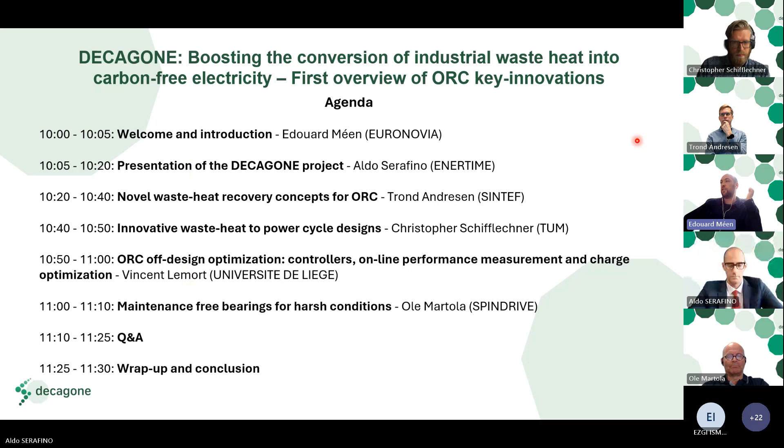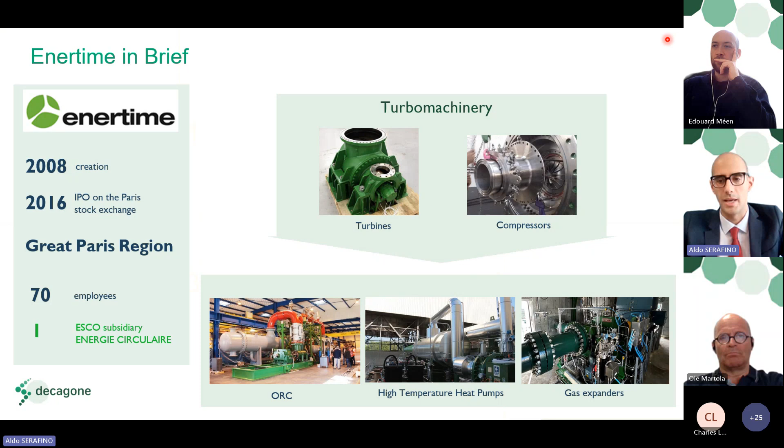I'm Aldo Serafino, Director of R&D Projects at Enertime, which is a French SME created in 2008 and based in the Greater Paris region with 70 employees. We manufacture turbines and compressors, and we are a producer of organic Rankine cycles, high temperature heat pumps, and gas expanders. My role here today is introducing you to the DECAGONE project.

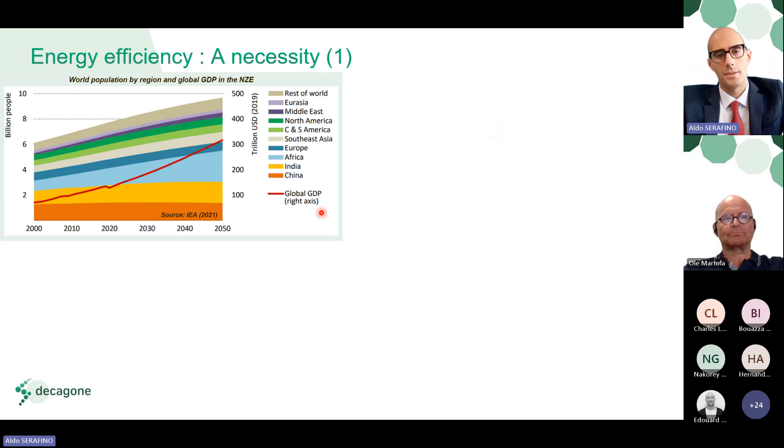This trend, on the one hand, results in an increase of total energy demand. On the other hand, if no action is taken, it results in a surge in greenhouse gas emissions. To indicate needed action to avoid the surge in greenhouse gas emissions, the International Energy Agency has introduced multiple scenarios in their World Energy Outlook that they publish every year. These different scenarios are indicated with different acronyms that you can see here. I will focus here on the last one, the NZE, which stands for Net Zero Emission. This is the scenario envisaging zero net greenhouse gas emission by 2050.

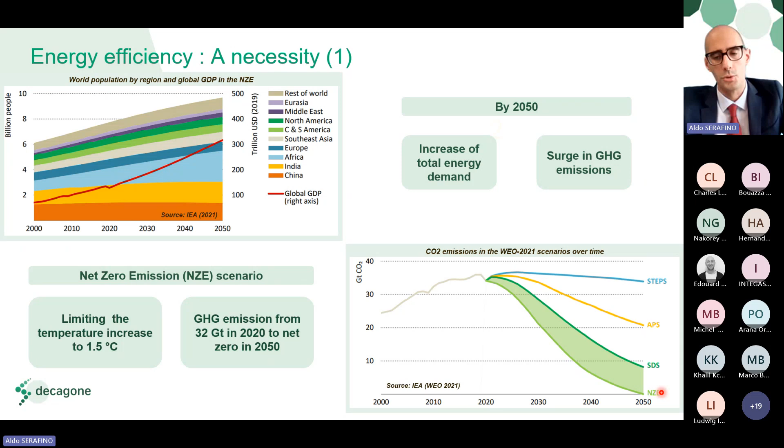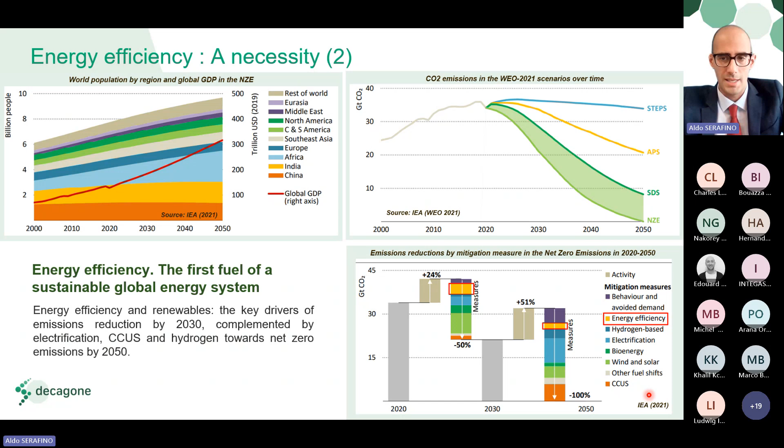So far, we know that this is the only scenario among all these scenarios that limits the temperature increase to 1.5 Celsius degrees by 2050. Now, this scenario showed that the global energy-related and industrial process emission of CO2 equivalent in 2020 is about 32 gigatons. And in 2030, it should reduce to around 21, and we should reach 0 by 2050. Achieving this rapid reduction of CO2 emissions in just 30 years requires a broad range of approaches and technologies.

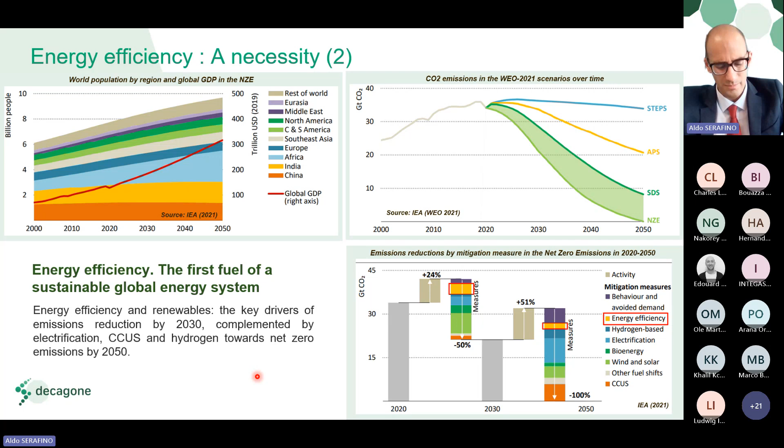The key pillars of decarbonization for the global energy system are here listed as energy efficiency, behavioral changes, electrification, renewables, hydrogen, bioenergy, and CCUS. In particular, energy efficiency and renewables are the key drivers for emission reduction by 2030, and they are later on complemented by electrification, CCUS, and hydrogen in the second stage of this sprint towards 2050.

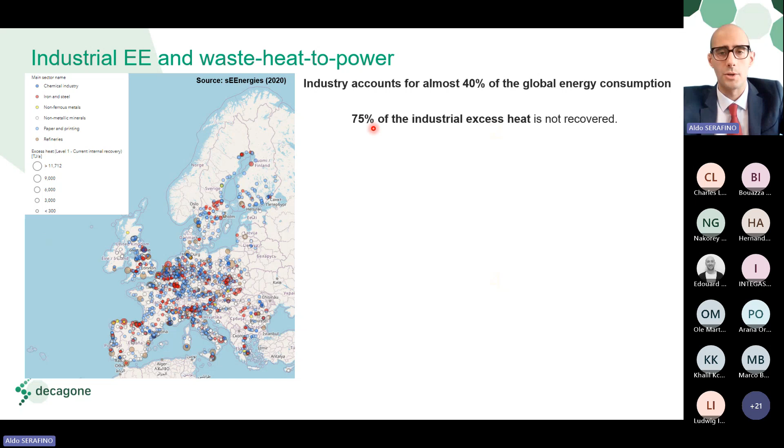There is a white paper by the Knowledge Center on Organic Rankine Cycle that did an estimation. If we consider only the low temperature and medium temperature excess heat that is now not exploited in Europe, and we exploit it by waste heat to power, we would potentially produce around 150 terawatt-hour electric per year. Now, this number, 150 terawatt-hour, is about 5% of the total annual electricity produced in EU 28,

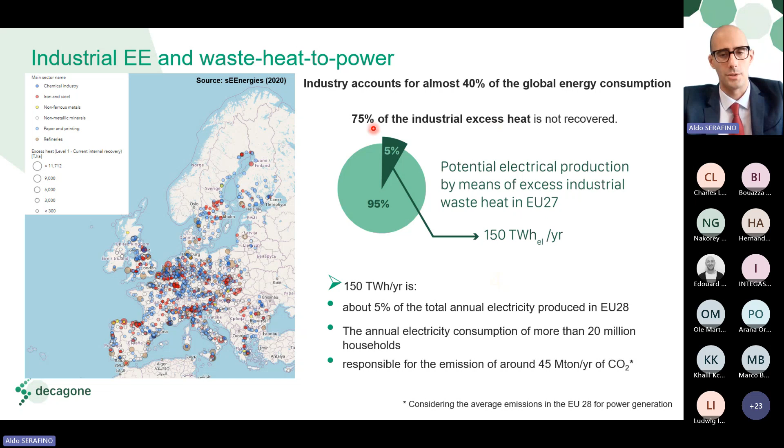is the annual electricity consumption of more than 20 million households, and is responsible for emission of around 45 megaton of equivalent CO2 per year, if you consider the average emission in the EU 28 for power generation. More specifically, organic Rankine cycle, also known with the acronym ORC, is a competitive technical solution to valorize industrial waste heat and convert it into electricity.

I'm not going to explain the general schematic of an organic Rankine cycle because I consider that everyone here already knows the system. If you want me to explain it, please write a question and I will do it in the Q&A. But here I would like to focus on some rather positive aspects of this technology. In fact, the electricity generated on site by the organic Rankine cycle does not cause any additional emission and is dispatchable and reliable.

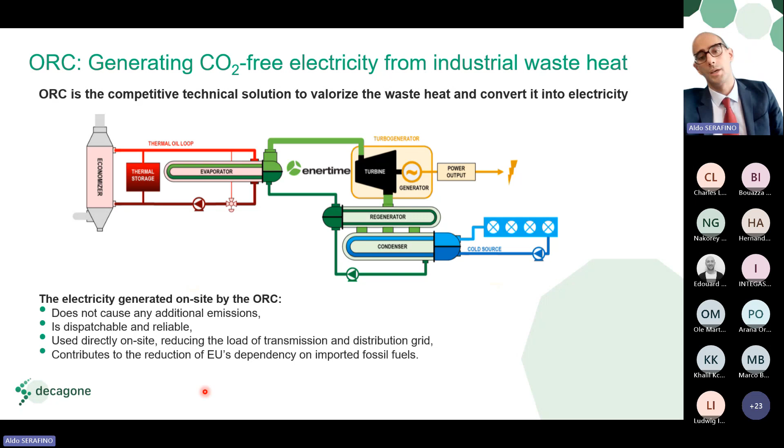Furthermore, in a context where electrification is becoming more and more important, the electricity produced by the ORC can be used directly on site without further burdening the transmission and distribution grids. And finally, the electricity generated on site by the ORC contributes to the reduction of the European Union dependence on fossil fuel and imported fuel.

In this context, the DECAGONE project takes place. DECAGONE, or demonstrator of industrial carbon-free power generation from ORC-based waste heat to energy system, is a Horizon project involving a consortium of 16 partners from 10 countries with a duration of 4 years. It started in June 2022 and it will finish in May 2026, with a budget of around 18 million euro.

The ambition of DECAGONE is preparing the ground for industrialization of advanced ORC-based waste heat recovery systems, aiming at wider and faster market uptake. Such an ambition is based on 3 pillars. The first pillar is increase in efficiency at the nominal point, the design point of the ORC, but especially in off-design conditions and overall, on the whole lifetime of the system.

The second pillar is the reduction of the total cost of ownership. With DECAGONE, we want to propose an ORC technology with lower CAPEX and especially with lower OPEX. And finally, the third pillar is system replicability. The technology proposed in DECAGONE will be easily replicable in the main energy-intensive industries. We target mainly the steel sector, metal, cement, petrochemical, glass, and oil and gas.

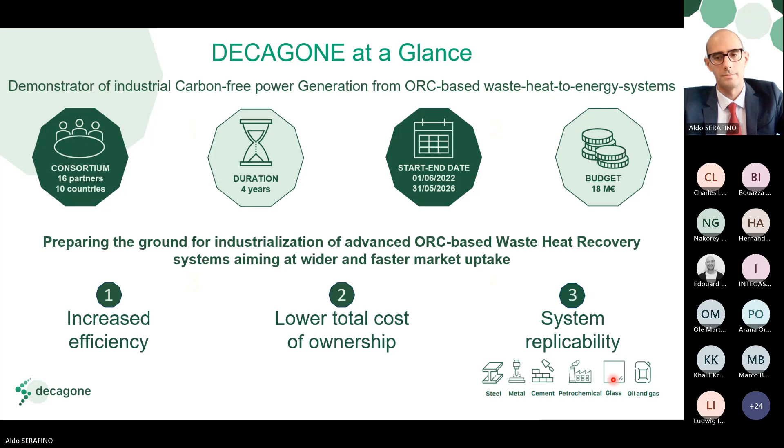Now, a key part of the DECAGONE project is the demonstration at TRL7 on an industrial scale. Specifically, in DECAGONE, we are going to perform the installation, the commissioning, and operation of a 2 megawatt demonstrator plant that will use the waste heat from the Třinecké železárny steel plant in Třinec, Czech Republic, to produce 2 megawatt electric power.

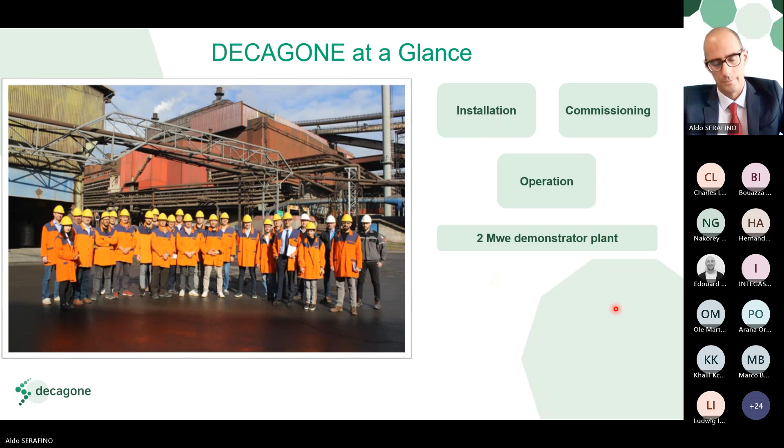Therefore, to summarize in just one sentence, DECAGONE proposes key innovations making organic Rankine cycle systems for industrial waste heat recovery more efficient, cost-effective, and flexible. But basically, how do we do it? Within DECAGONE, we set 5 objectives that I list in the following. The first objective is the development of new component architecture, models, and technologies. The second objective is validating innovative approaches using new experimental setup and design capacities.

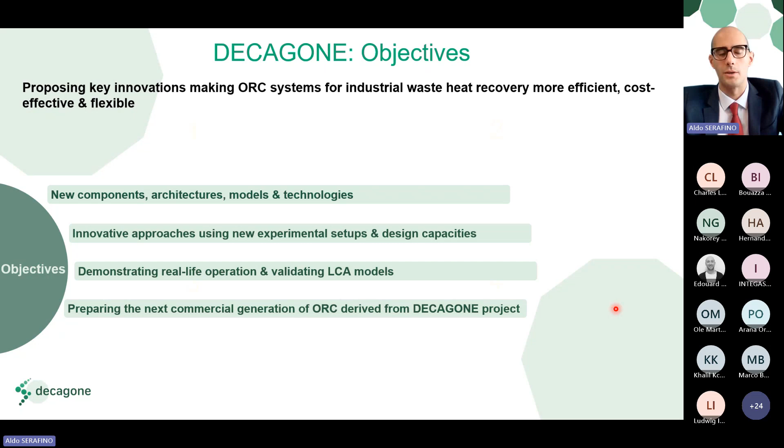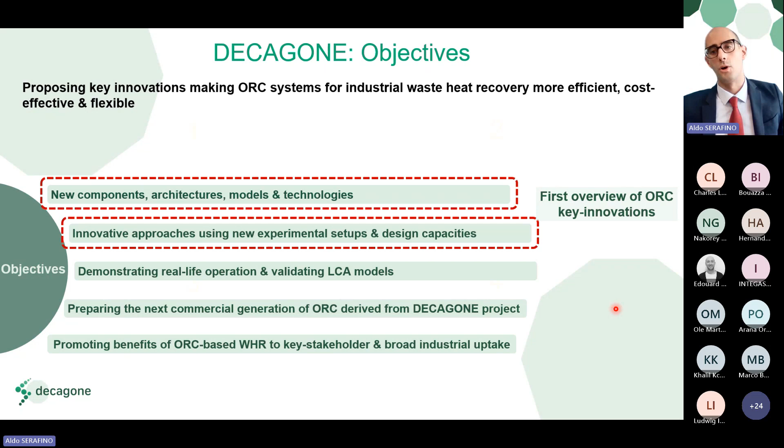The third objective is demonstrating real-life operation and validating the LCA model. The fourth objective is preparing the next commercial generation of ORC derived from the DECAGONE project. And finally, the last objective is promoting benefits of ORC-based waste heat recovery to key stakeholders and broad industrial uptake. In this webinar today, we will focus on the first 2 objectives, and we will provide you with a first overview of key innovations for the DECAGONE ORC.

Now, exploiting waste heat from an industry, such as for instance a steel mill, poses multiple challenges that should be taken into account.

Without being exhaustive, we can think, for instance, of the fact that exploiting industrial waste heat means that every fluctuation of the industrial production results in a variation of the heat that is available for the organic Rankine cycle. Moreover, depending on the process, we can have a different composition of the flue gas with different dust content, and this has an impact on the heat exchanger part.

And then we can also consider the fact that installing a system in an existing industrial facility places considerable constraints in terms of available space for this new system. Therefore, to be successful, the DECAGONE project must come up with a technology that can deal with all these challenges. We have therefore worked on

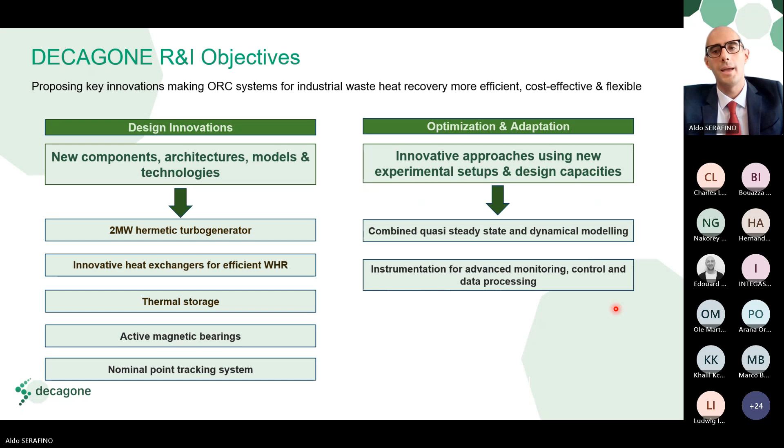the development of a 2 megawatt hermetic turbo generator, innovative heat exchangers for efficient waste heat recovery, thermal storage, active magnetic bearings, and the nominal point tracking system. Moreover, since we want to optimize the system with models that we also want to validate and retrofit, we worked on combined quasi-steady state and dynamic modeling, and on advanced monitoring, control, and data processing.

And once the demonstrator is in operation, we will perform in-operation control and monitoring, validate the modeling, and perform the retrofit of the component design. Today, DECAGONE is almost at the mid-life of the project; we have already worked for 21 months.

So my name is Trond Andresen. I come from SINTEF Energy Research, a research institute in Norway. Today I will talk about some aspects and considerations around our heat recovery system for an ORC, specifically for the demonstrator in the DECAGONE project. This has been a collaboration with most partners in the project, but what I'm presenting today can mainly be credited to input and contributions from SINTEF, Enertime, and CEA. So I will not take the glory of all the work here, but I'm happy enough to present it.

I'll start by talking a little bit about what makes the conditions at our demonstration site special, and then I have to select something, because we have done a lot of work in the last 2 years. So I will talk mostly about the waste heat recovery heat exchanger and the thermal storage as part of this heat recovery subsystem.

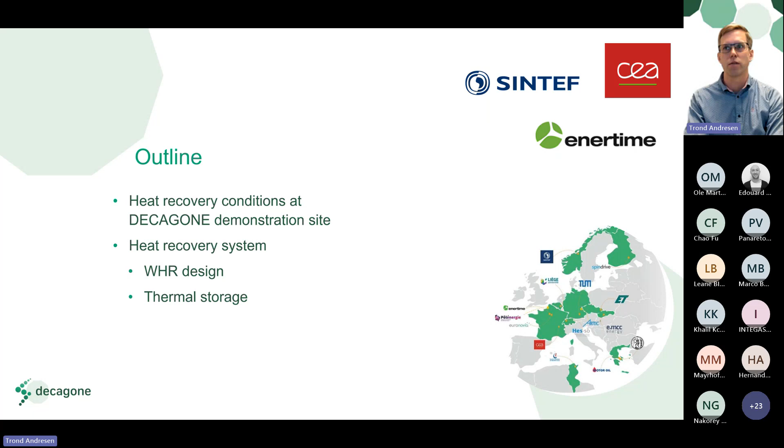So first, one can make some reflections about why we are really focused on this demonstrator, and I guess that's also what's really interesting for most of us. DECAGONE is, as Aldo just said, a research and development project for the next generation of ORC technology. On the other hand, it's designing, commissioning and testing a demonstrator for a very particular implementation. As academic and research partners, we have a very interesting role in this project, where we are conscious that we don't have all the answers, but we can maybe offer a different perspective on the development of such a demonstrator.

And as we are not constrained by any product or solution that we are selling, we feel more untethered to explore and compare various technology options. That's one of the things the research partners in this project have been doing: looking at all the different options and reviewing them in our way.

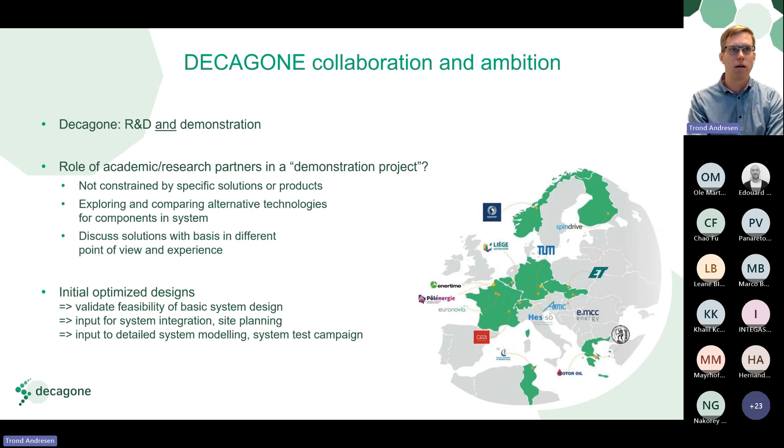But also, since there is quite a tight schedule in this project, we have to do a lot of things in parallel, which means the more information and realistic behavior about the system and components we can come up with in the development phase, the more it will help the implementation of the project. So we have also provided what we refer to as initial optimized designs of the components. While they are not necessarily indicative of what solutions will be implemented in the end, this is a way of validating that the performance we are aiming for can be reached with a design, even when performed by researchers. And this is really useful, because then we can continue the work with system integration, permitting and site planning, making sure everything fits on the site, and also plan instrumentation and control strategies.

So heat recovery, I will talk now a lot about the demonstrator. And as Aldo said, it's to be implemented at the steel plant in the Czech Republic. But that also means that we are very much needing to adapt to an existing process, a live plant and infrastructure that's been built up and evolved for many, many years.

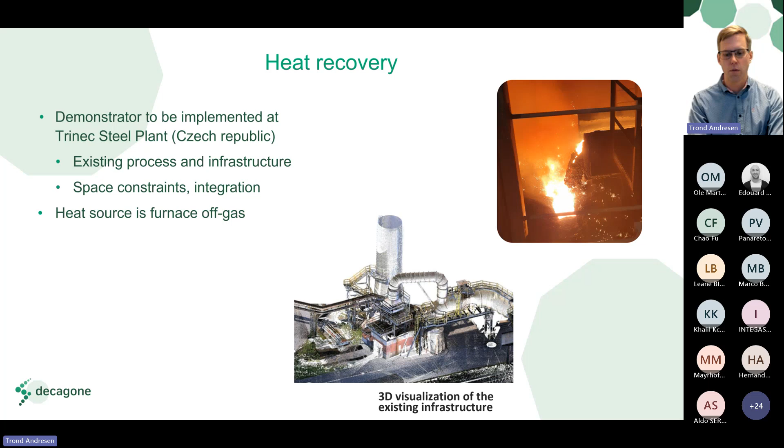And that means that we have space constraints. It means we have very site-specific conditions, for instance, the off-gas we will talk about, and also integration of a system in a brownfield such as this is really complicated. So the heat source is furnace off-gas,

and it was documented in the site analysis that the heat content, the thermal power in this off-gas, in this heat source, is very variable. And it's not just the flow rate that's varying, it's also the temperature. So we have two things changing.

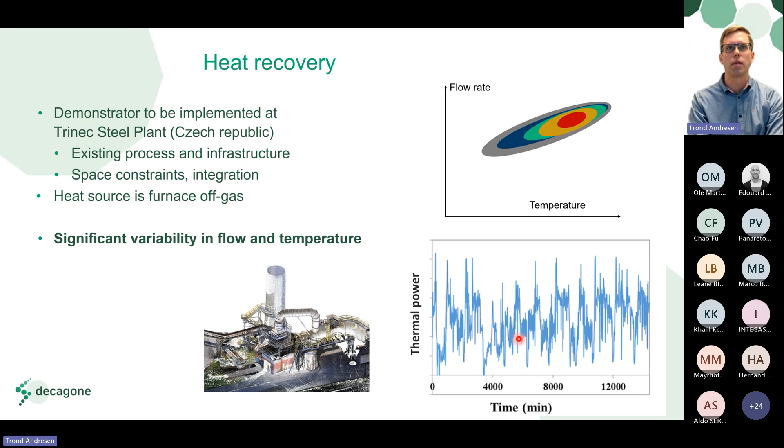So while we can see from the site analysis that the average thermal power in our off-gas is more than sufficient to, let's say, align with our ambition of a power output of the DECAGONE project, the variability is certainly a big issue. We don't want to see this kind of rapid variability in our ORC. So that's a particular challenge.

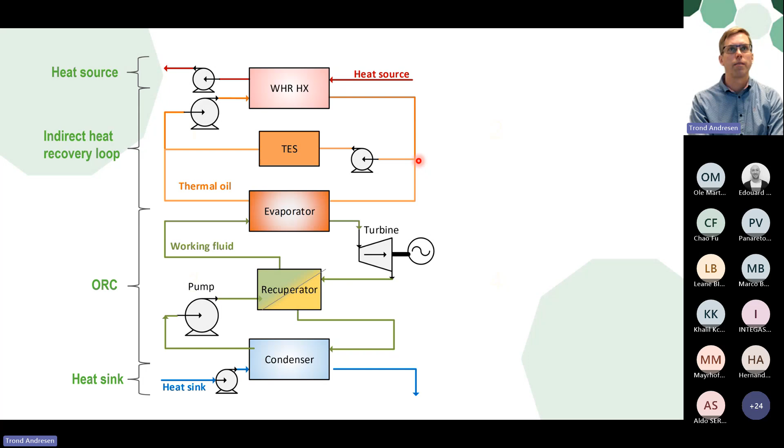So here I made my own very simplified outline of the whole system, of course aligned around the heat exchangers and thermal storage, which has been my main focus and interest in this project. But in this sketch, we can see that the ORC, the core ORC, quite normal recuperated ORC system, is placed here. And then between the ORC and the heat source, we have an indirect heat recovery loop, or if we include all the components in the system, it's what I would call the heat recovery system.

And then, as I said, our problem is that this energy in this heat source is quite variable. And we really want to decouple this heat source from the ORC. So we need to design a heat recovery system that not only needs to work, let's say, theoretically optimal, but it also has to be implementable and be able to fit in this location.

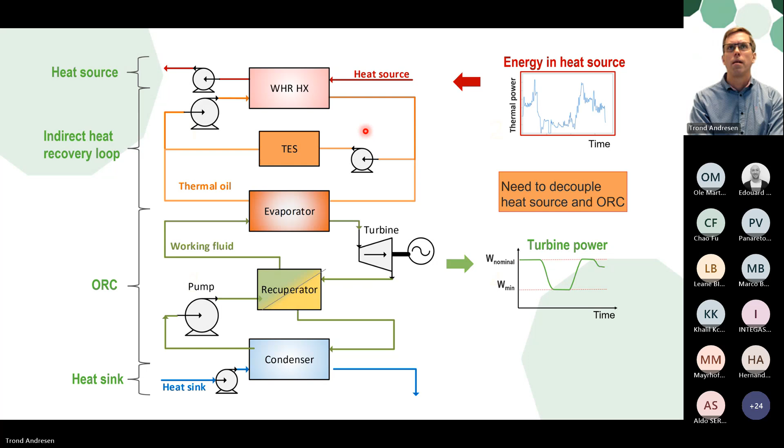So first, I would say a few words about design considerations for the waste heat recovery heat exchanger. And this is what actually sees the highest fluctuation in conditions. But nevertheless, in order to perform a design, as part of the basic design of the whole system, a system design point also for this heat exchanger was selected, and then we have a set of performance requirements to focus our design around. So that includes duty and it includes temperatures on both sides, but it also means we have a maximum limit on pressure drop that we must observe.

And now this design point can be the basis for all our various theoretical evaluations, which includes looking at different options for all the heat exchangers, even considering stuff that is not feasible for the demonstrator, but could certainly be possible in future implementations in a different industrial scenario and a different heat source, etc. And that includes stuff like direct versus indirect heat recovery, technology options such as heat pipe, which really lends itself more to a direct heat recovery implementation. So with all that aside, we can start working on how to make the best possible design for this system design point and for each technology we look at.

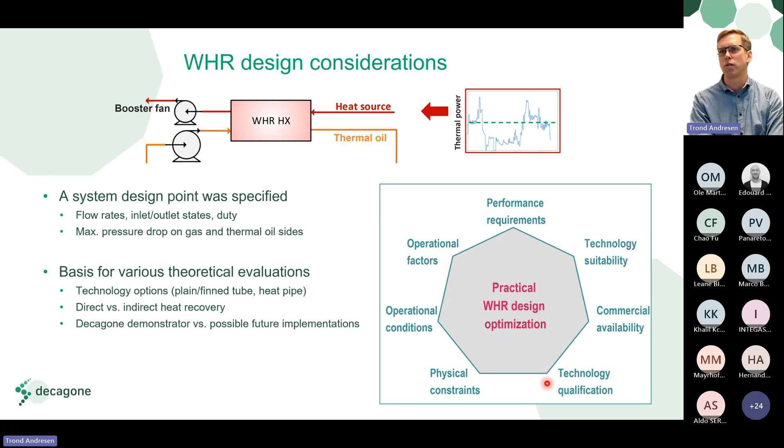Yeah. So with all that in place, we can then start doing design optimizations. And optimizations are really just another word for trade-offs. There's no free lunch. But what we are aiming for in our case is the highest possible performance for low cost in a compact package. But this is not easy to do on a pre-engineering level, and it's very complicated to reliably optimize.

And for the next slide, I will just show a plain tube bundle in an indirect system, which means the off-gas is here, and then across the off-gas flows the thermal oil in plain tubes with no fins, basically. And then we can produce an optimized design specification of how this heat exchanger should look and whether or not it could meet these performance requirements in a reliable way.

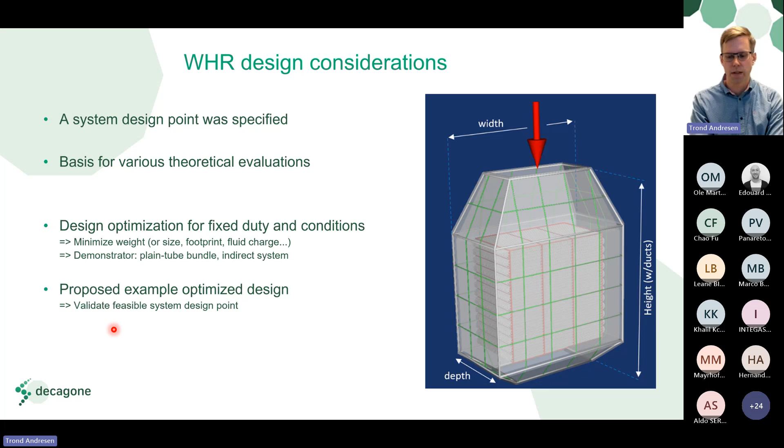And even for such a simple heat exchanger type, there are a lot of design parameters to optimize. As I said, inside this shell there will be this coil of tubes. And then, of course, each tube has a diameter, it has a wall thickness, it has a certain spacing longitudinally and transversely, and the tubes have a length. These are all continuous variables in optimization.

And then we have a lot of configuration options, which are discrete variables, integers, if you will. It's the number of passes, the number of rows, how it is configured and laid out. And finally, we have influence from the casing itself. It has some duct plates, support structures and beams and a certain diffuser angle. So the size of the core will then dictate the size of the casing and then the weight of the

casing in the end. And as I said, for each of these design points and performance criteria, we want to minimize the weight of the casing and the support and the core itself together. And we could add on the fluid weight in addition, but in this particular technology, it is relatively minor compared to the steel weight.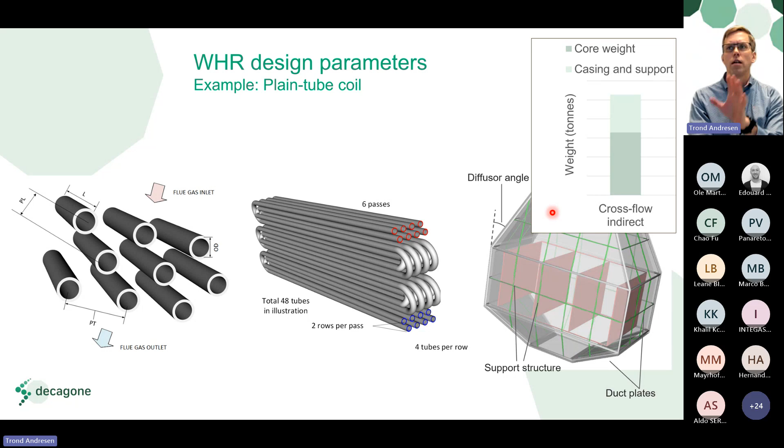So we can complete a design such as this that we can propose, but it's really important to understand the influence of these parameters that we have decided upon in this design point, in the performance criteria. And one that's not so easy to relate to, but has crucial importance, is the gas side pressure drop. Since we have considered that you need to use a booster fan to compensate for any pressure loss on the gas side in our system, that fan work will be detracted from the net power. So naturally, we want to have a very low pressure drop on this gas side.

But if we perform such a weight optimization for different budgets in flue gas pressure drop, we can clearly see the weight of the heat exchanger, and that also very much indicates the overall size of this heat exchanger. And that again translates to cost. So if you want a heat exchanger with very little fan work, it will be massive and expensive. And at some point, it will probably not fit at the demo site. So this is very much an example of a real trade-off, where we think a good trade-off will probably be in this region somewhere. There are benefits and trade-offs to such an optimization, and to understand that and take it into system design is interesting but complicated.

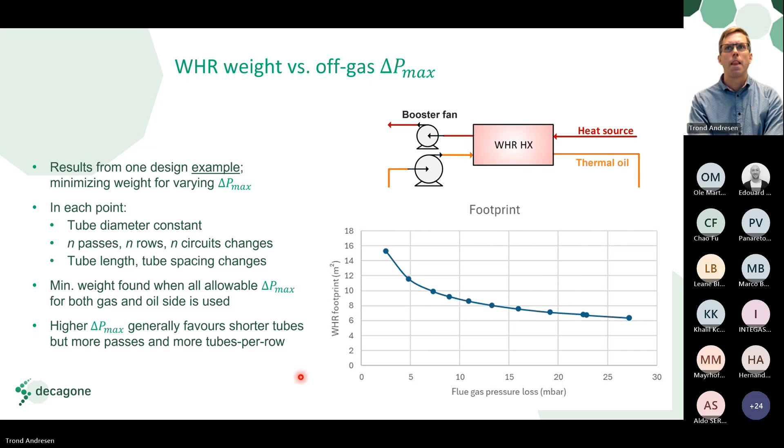So then when we have our example design, we very much need to understand the off-design behavior, because this is the component that will see the highest variation in conditions. So with a fixed design of everything, we can then investigate how the oil temperatures will change with the temperature and flow rate, and how the capacity, the duty of the heat exchanger will change. What kind of outlet gas temperatures will we see that will propagate down the rest of the system, and the pressure drops on the oil and gas sides.

Again, you fix the design and you do the off-design behavior test, more or less, to see if it's compatible with a control strategy and an operational envelope for the system.

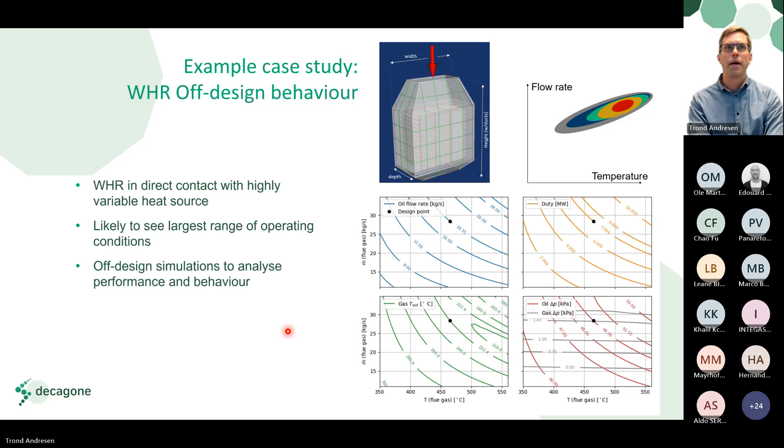So that brings me over to the next point. We have seen a little bit about the design considerations going into this component. Now we are turning to the next, maybe most exciting component in the system, a clear novel addition in a practical demonstration. And it is the thermal storage that enables such a decoupling of the energy in the heat source and the energy that is supplied to the ORC.

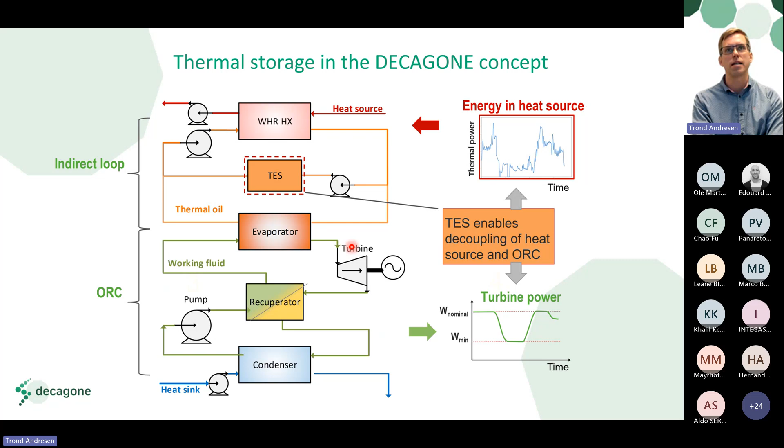And also with this component, there are many considerations. There are so many options. The first is to consider how you are going to integrate thermal buffering, a thermal storage, into your system. I cannot cover everything here, but it was decided to use an indirect loop and to place the thermal storage in parallel with the evaporator of the ORC and the waste heat recovery heat exchanger.

There are really a lot of not just technology options, but families of technologies. You have thermochemical, latent, and sensible heat as three common families, and each of these has a tree of different options, variations, materials, and solutions.

We also need to think a bit higher TRL for the demonstrator. This was considered for general technology integration, but for the demonstrator we have gone with a dual media thermocline - a cylinder, a tank with a solid material where oil flows around it. The oil flowing around it is the thermal oil from the indirect loop. From this, we can do detailed studies to close knowledge gaps, perfect the design, and understand what capacity we need to meet the requirements before moving on to mechanical design.

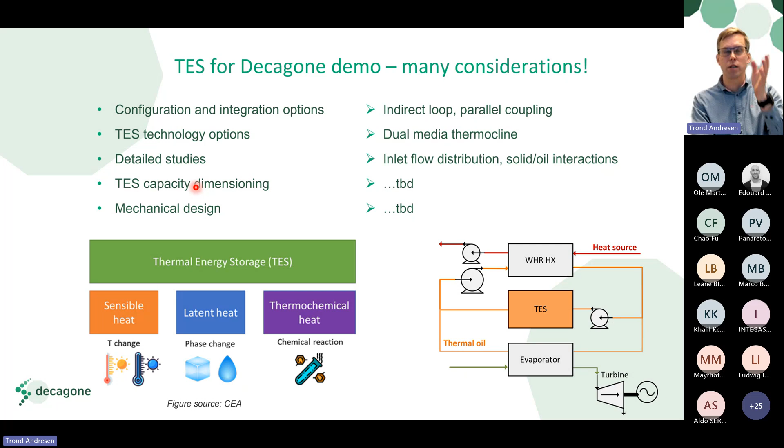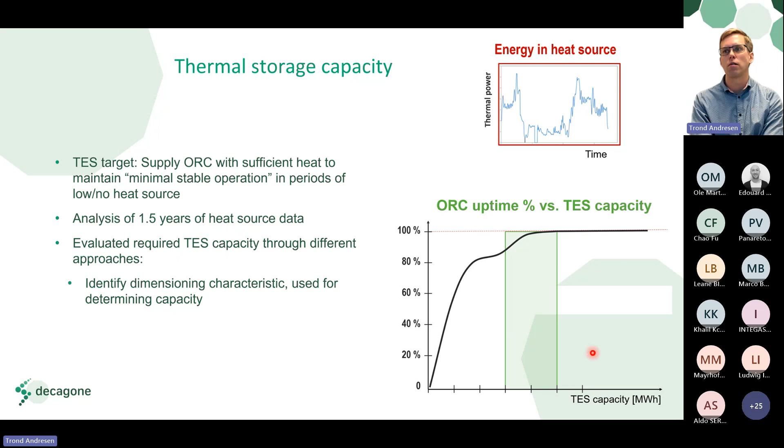So what thermal storage capacity do we need? It started with many different ways of analyzing the available data from the demo site, using different filters and approaches to understand the most critical characteristics requiring storage capacity. In this principle sketch, it's really about the percent of time we're able to supply the ORC with sufficient heat to maintain consistent, continuous operation. We found a target area where we cover almost all heat source scenarios to maintain operation, landing at a few megawatt hours of effective capacity.

Now just a few examples of detailed studies performed. First, regarding the actual design, it's important for us to maintain a clear separation between hot zones and cold zones in the storage. As we charge and discharge it, this line moves, and we want to avoid mixing whenever possible to maintain effective, high temperature storage. So understanding and designing the inlet and outlet flows is really important to avoid mixing - that's an example of a study.

Another aspect, perhaps less thought about, is how the fluid reacts long-term with the solid material in such a dual media storage. In the labs of CEA, they are performing long-term tests at correct temperatures and pressures to see how both the oil and the material change over time. The results are, to me, quite remarkable - it underlines the importance of such tests to select the correct combination of materials.

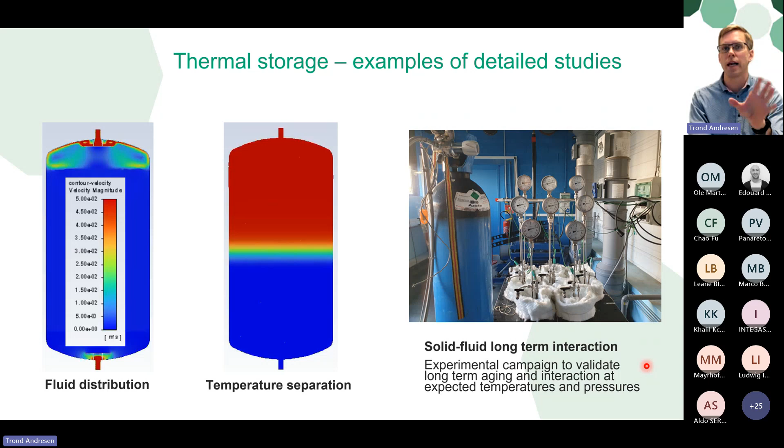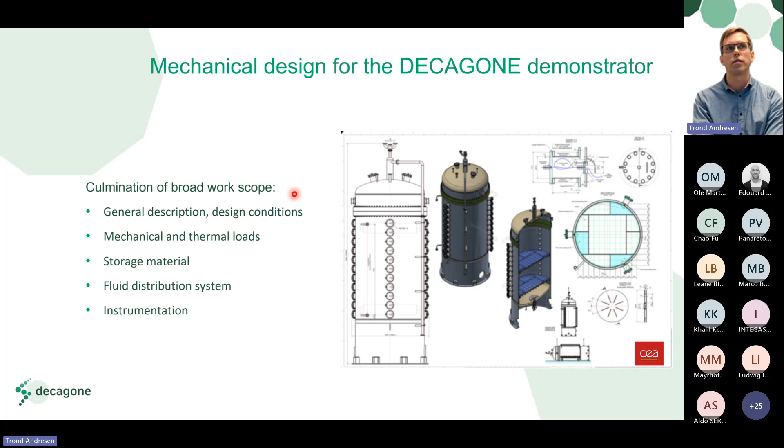All of this culminates into being able to start the mechanical design of the thermal storage, thinking not just about thermodynamic performance but also mechanical loads, thermal loads, finding solutions for storage material distribution, instrumentation, control strategies, etc. It's a broad range of activities leading up to the final design of such a component, but it's something we really look forward to seeing in operation.

So that's basically it. This is an interesting way to combine takeaways from theoretical studies performed by a research partner with the feedback and solutions proposed by suppliers, to see how we can make the best possible combination in the end. So thank you.

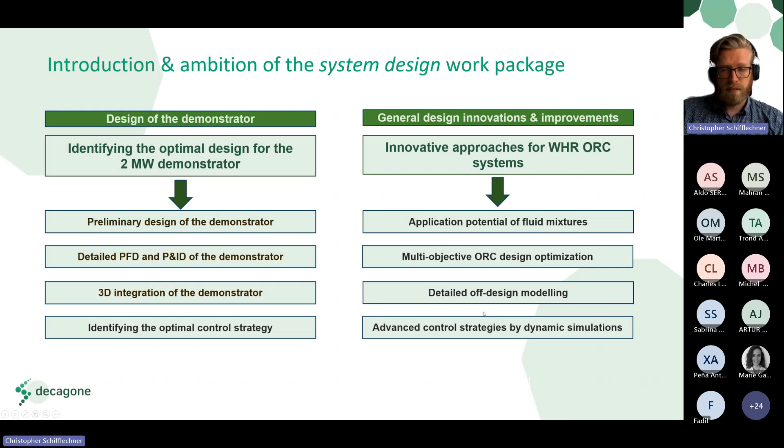With respect to the general performance and design of the demonstrator, we carried out detailed simulations to study the impact of different plant configurations. These numbers don't 100% represent the actual demonstrator but are in the same magnitude, and were also presented by our partner SINTEF at the last ORC conference. For a selected design point representing the average characteristic at the demonstrator site, we looked into non-recuperative direct evaporation concepts and studied the impact of different design choices. In the selected base case we achieve a net power output of roughly 2 megawatt electric.

The neglection of a recuperator would result in a significant drop in the achievable net power output, while a system with direct evaporation, with no intermediate thermal oil loop between the heat source and the ORC, would only result in a small increase of the achievable net power output. In combination with the strong fluctuations of the heat source and the ambition for a novel thermal energy storage system, presented by Trond before, this is one of the reasons why this indirect design with thermal energy storage was chosen for the demonstrator.

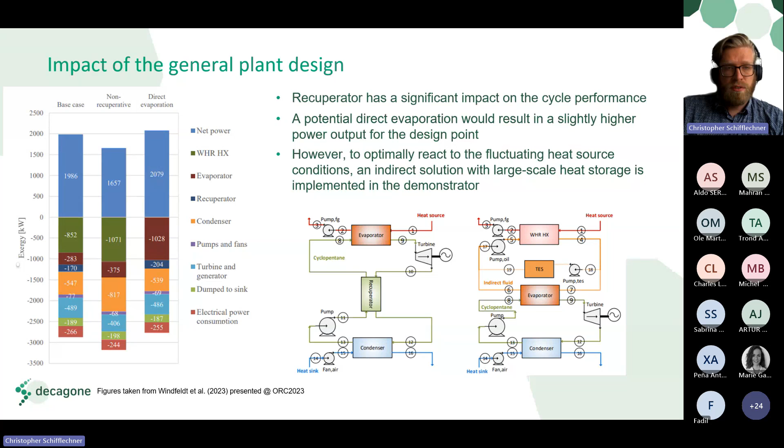Another important aspect in ORC design is the condenser technology. Due to the limited achievable efficiencies from medium temperature heat input, a lot of heat is rejected at the condenser. So the design of the condenser is quite crucial with respect to costs, but also auxiliary power demand, for example driving the fans of an air-cooled condenser.

Next to the air-cooled solution, 3 alternative condensation approaches have been evaluated, mainly direct water condensation and spray-cooled air condensation. Looking at the base case, a direct water cooling system would increase the achievable net power output by around 200 kilowatt, while spray cooling only has an increase of around 70 kilowatt. Direct water cooling would have been a measure to increase power output for the demonstrator, but it requires constant availability of cooling water, which is not the case at the demo site, so an air-cooled condenser was chosen.

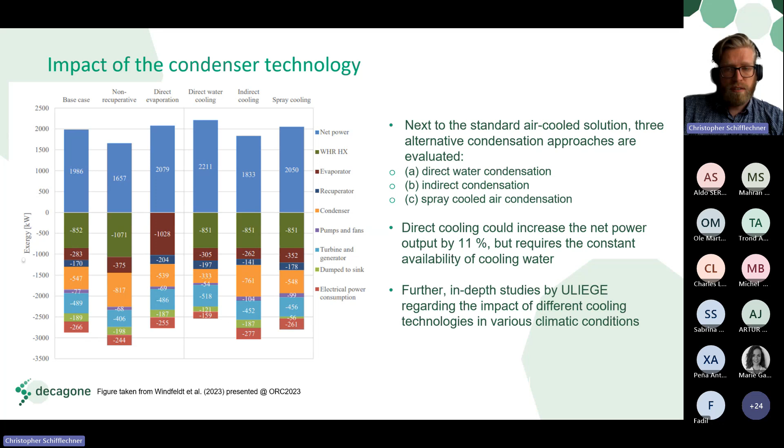What is currently also ongoing, by one project partner from the University of Liège, is in-depth studies for the different condensation technologies, also considering the various climatic conditions across Europe, to study the effect of the different condenser technologies in different regions in detail.

When it's about the demonstrator and cycle design, the heat source outlet condition has a certain impact. There we have a trade-off between maximizing the heat extraction rate from the flue gas and avoiding local condensation on the waste heat recovery heat exchanger surface.

With respect to the required materials and temperature pinch point in the waste heat recovery unit, we studied in detail the impact of the outlet temperature of the heat source on the achievable net power output. The dashed lines indicate solutions where the temperature is below the general limit set to prevent flue gas condensation. In general, the power output is not very sensitive to the heat source outlet temperatures, so it doesn't make sense to put a lot of effort into solutions allowing slightly higher cooling down of the flue gas stream, because you would only get a very minor increase of net power output.

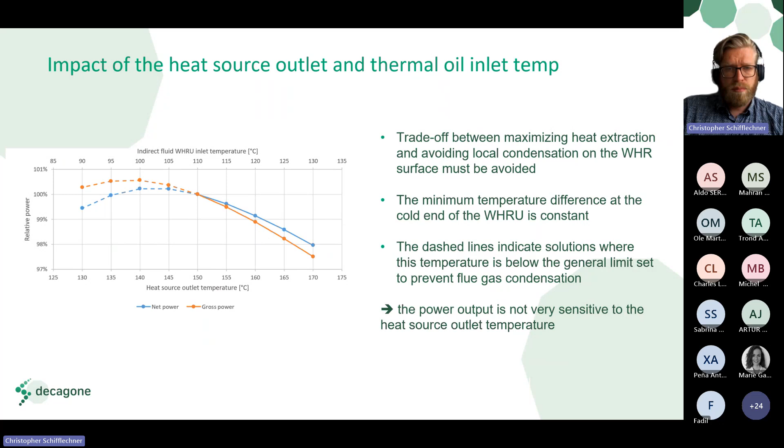As also mentioned by Trond before, when retrofitting a waste heat recovery ORC system in an existing industrial setting, space limitations are often a quite important challenge which needs to be tackled. The available space for the ORC, and therefore the available volume and space for the heat exchanger, is limited.

This brings us to the question of how to allocate the available space to the different heat exchangers. The partners from SINTEF carried out detailed optimization studies where they decided that the share of area between the different heat exchangers is a design parameter which can be optimized by the simulation model. So it's not fixed what the exact pinch point and area of each heat exchanger is, but the system optimizes it for different stated total heat transfer areas. For example, if the system has 10,000 square meters of heat transfer area available, which can be allocated to the different heat exchanger types like the condenser, recuperator, or evaporator, the system optimizes their allocation.

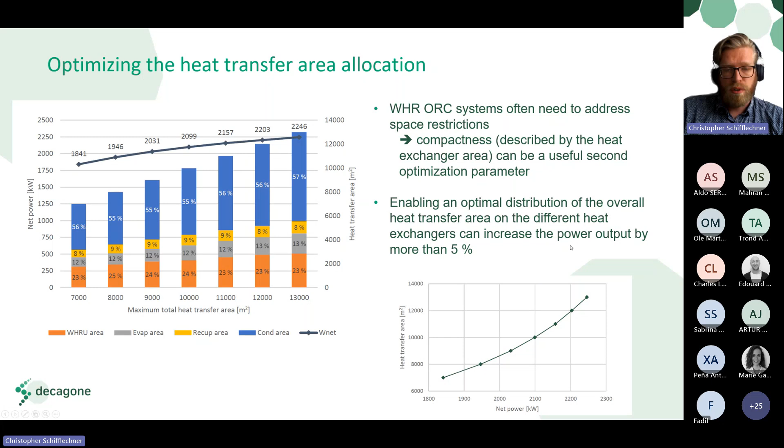As expected, for higher potential heat transfer area, the net power output can increase. But the results also highlighted that having such a sophisticated optimization routine, which allocates the heat exchange area between the different heat exchangers, can increase the achievable net power output by more than 5%.

So, already concluding my short presentation: in summary, we looked at the preliminary design of the demonstrator, and also dealt with optimizing the heat transfer area allocation for waste heat recovery ORCs. Detailed studies on fluid mixtures and their potential have also been carried out so far, which wasn't shown due to time constraints, but I can recommend one paper from our partners at CEA, which was presented at the ORC conference in September.

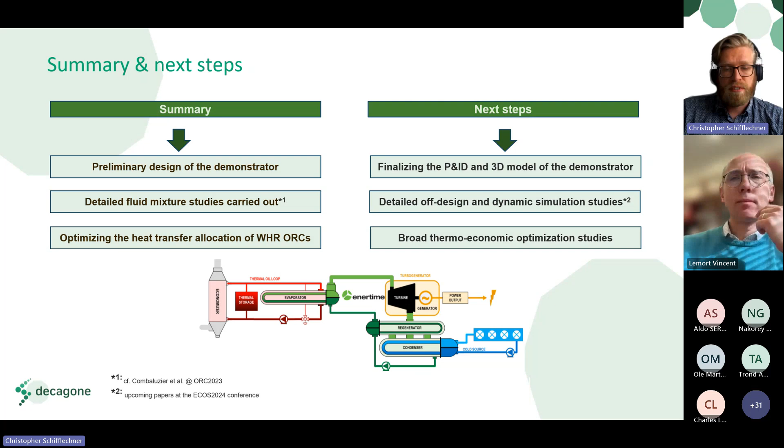So, what are the next steps? We are finalizing the P&ID and the 3D model of the demonstrator, and we will carry out detailed off-design and dynamic simulations, as well as thermoeconomic optimization studies. Some papers will be presented at the upcoming ECOS 2024 conference. Thanks a lot for your attention, and so I stop sharing.

Many thanks, Christopher. So now we have Professor Vincent Lemort from University of Liège. Vincent, the floor is yours. Yeah, can you put it in full screen? Yes, please, if possible. Okay, does it work? It's coming. It's not full screen yet. Okay, I don't know, it is on my computer at least. Maybe it's just me, but I don't think so. Or is it—yeah, okay. Can you zoom in a little bit? Then I guess it's fine. So is it working like this? Yeah, yes, okay, so I propose we start.

Good morning, everybody. I'm Vincent Lemort from the University of Liège. I will talk about the performance of our ORC system in off-design, and indicate some means to improve this performance and also to increase the reliability of our ORC power systems.

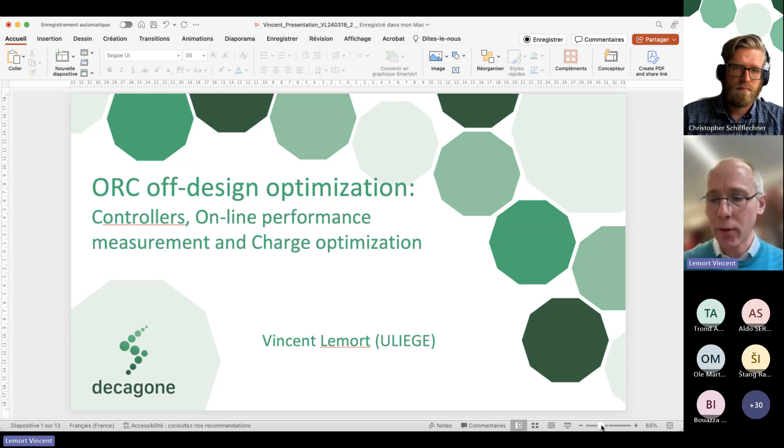You may know that ORC often works in off-design regime, and that yields lower performance than expected, which is not very good. So I would like to understand why, first, what is off-design. What I call off-design is operations, conditions that are not the ones that have been considered for sizing the different components of the ORC systems. So that's what I would call non-nominal conditions.

Off-design has some reasons. The first one is it is due to variations of the heat source and the heat sink. Time variation could also be variation of the load imposed by the expander, turbine, or generator. Typically, we have to manipulate some variables to adjust the range of operation of the system to bring it into a safer, more reliable, and most efficient zone. So sometimes we have to play on the speed of the pump.

So this is, for instance, what we call the part load operation, where we reduce the speed of the pump. But off design could have other reasons. So it could be due to degradation at different paces. So it could be simply aging of components up to a total failure of the components. But not only the components, it might be due also to sensors.

And then we have to detect some faults. We have to propose some diagnosis, and potentially also to implement some predictive maintenance. So this is something I will talk about a little bit later. But there is another reason why the system may operate in off design. So that might be due to a gap between the predictions of the models that have been used for sizing the different components of the ORC and the actual operating conditions.

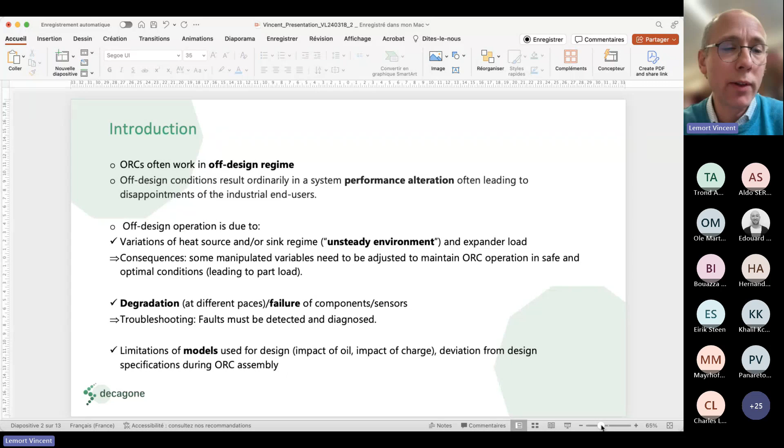So if we consider even nominal conditions, we could have different pressures, different heat transfer rates, different powers than the ones that have been expected. And this is due to some limitations of the models. So the models may not, for instance, take into account correctly the impact of the oil, the impact of the charge. And also some off-design condition may be due to some deviation from the design specification when the ORC is under construction.

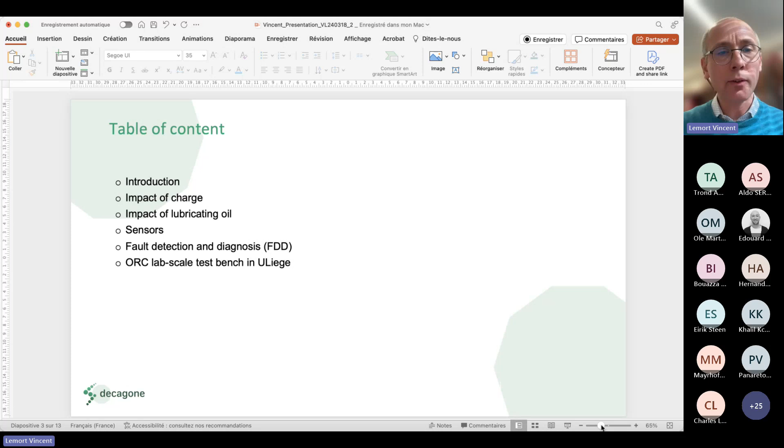So I would like to give a few words about the impact of the charge, of lubricating oil. I will talk about sensors, fault detection and diagnosis, and then I will present the ORC lab scale test bench that is under construction at the University of Liège in Belgium.

So you know that the performance of an ORC system will depend on the quantity of fluid inside the loop, what we call the charge. And the repartition of the charge among the different components of the system will depend on the operating conditions. And this is what is shown here on the right, from the top to the bottom. If we increase the load on the evaporator by increasing the pumps or reducing the superheat at the turbine inlet, we are going to have a higher quantity of refrigerant in the evaporator, so a lower subcooling, and so a lower condensing pressure, which is beneficial for the ORC system.

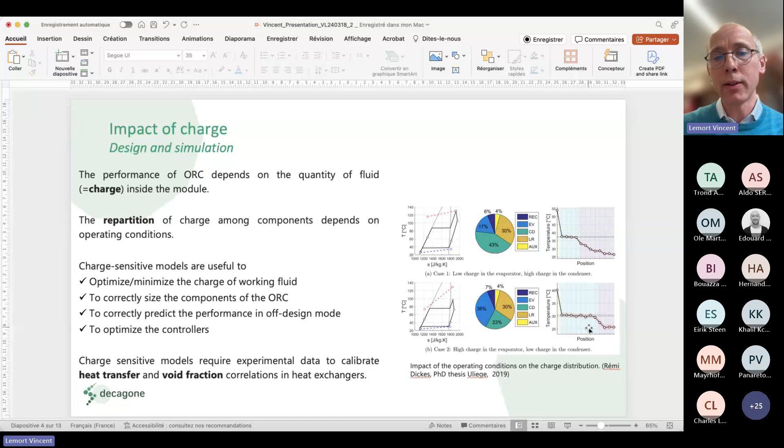So we have to develop some charge-sensitive models. They are useful for minimizing the charge of working fluid, and this is especially important for flammable fluids. We want to limit the quantity of fluid, but also to correctly size the components of the ORC, to correctly predict the performance in off design during design of the system, and also to optimize the controllers. For that, and this is what is very tricky, we need experimental data for calibrating the heat transfer and the void fraction correlations that are used in the heat exchangers. And so this is during the design.

And during the operation, charge-sensitive models are also very useful. They can be used in combination with FDD, so fault detection and diagnosis, to identify some leakage of working fluid, but also to derive what we call active charge management techniques. These are physical techniques that are used to control the quantity of fluid inside the loop and to adapt it in off design in order, for instance, to minimize the subcooling and so decrease the condensing pressure. So this is what we saw on the previous slide, to increase the control versatility, to increase the operating map of the system, and also to decrease the response time, which could be also beneficial.

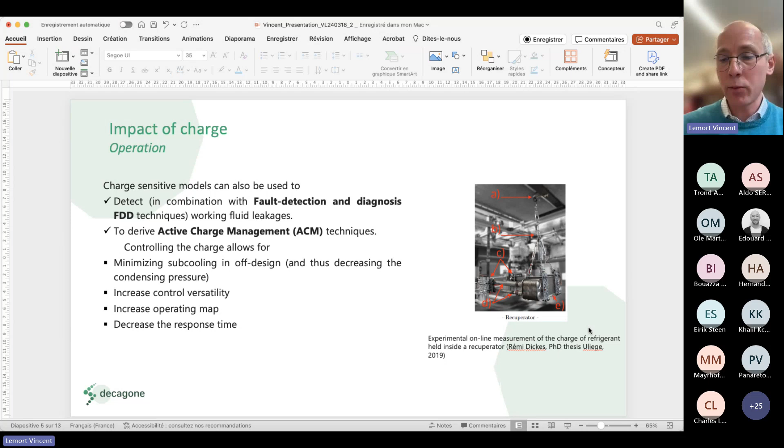The second aspect is the oil. So oil has different effects. So first, it will impact the performance of the heat exchangers. So it will degrade the heat transfer coefficients. It could increase also the pressure drop through the heat exchangers. It could be deteriorated if there are some hot spots in the evaporator. And there is also a risk of oil trapping in some places of the ORC, and so a bad return of the oil to the turbine.

But also very important is the fact that the properties of the mixture of oil and working fluid are not the ones of the pure fluid. And this is what is shown here on the right. Even if we have a temperature that is higher than the saturation temperature, so we have some apparent superheat, we still have some working fluid that is not vaporized, but still in liquid phase mixed with the oil. And so the superheat is only apparent.

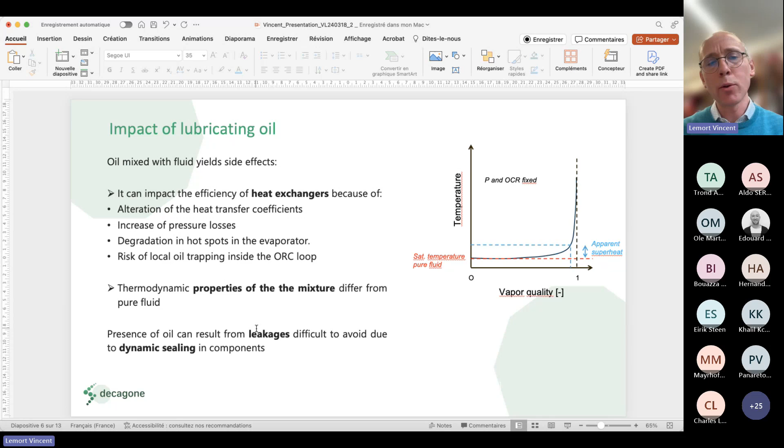And so this graph is for a given pressure and a given oil circulation ratio through the cycle. And this effect is even more important if the oil circulation ratio is important. In our case, the presence of oil in the system might be due to some leakages that are very difficult to avoid due to dynamic sealings in components of the different machinery.

Sensors are very important, so there is a trade-off to be found for the selection of sensors between the cost and the accuracy. For the accuracy, maybe we are not going to use the same accuracy for sensors used for control. What is important is the drift. Then sensors used for calibrating the models of components. It's also very important to keep in mind the accuracy of the sensors at the bottom of the scale, especially for systems operating in part-load operation with reduced flow rates, for instance.

And some sensors should be characterized by very short response times. For instance, temperature sensors that are used here at the inlet of the turbine should react very fast in order to protect the turbine. And then we have installation constraints. The system should be ATEX. We have to cope with pipe diameters and lengths, the direction of the flow.

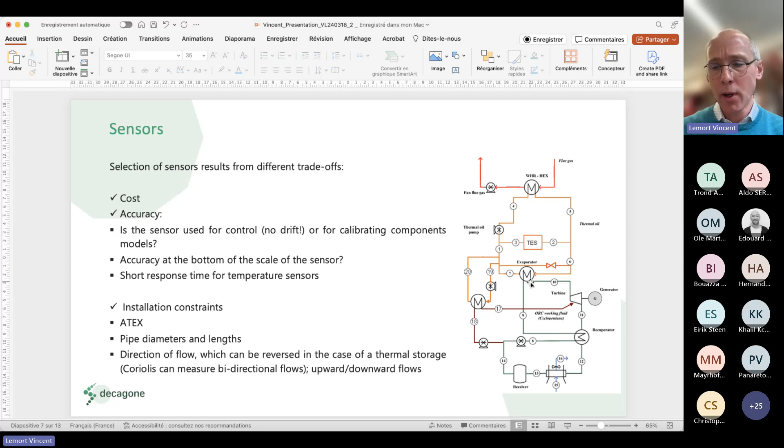For instance, in the case here on the oil loop, in the case of the thermal storage, during charging and discharging, the flow could be reversed. So we have to use, for instance, flow meters that could be bidirectional. And we have also to take into account the flows that could be upward and downward in the selection of some of the sensors.

So we saw that degradation forces the system to be off-design. Off-design means degradation of performance, and so deterioration and decrease of the economical benefit of the ORC. But we know also that if we want to service, to repair, or to maintain the system, there is also a cost, and so there is a trade-off to be found in terms of time when we have to service the system. If we wait until full failure of a component and full reparation, the cost could be very high.

So in the project, we design and we implement algorithms for fault detection and diagnosis and methods for predictive maintenance before failure occurs. And such methods need to have some models of components that are able to simulate degraded performance. So this is very important. But prior to fault detection and diagnosis, we have to clean the data. So we have to develop statistical methods to define the outliers in the experimental data.

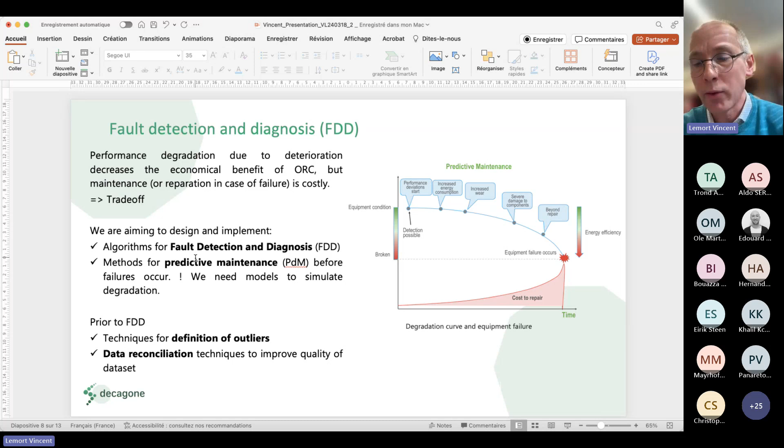Also to increase the quality of the data set using, for instance, what we call data reconciliation methods, where we implement some corrections on the measurements, taking into account the accuracy of sensors, but also meeting the physical constraints like the energy balances of components. So these are some statistical methods we are applying in the project. So all these algorithms allow us to have cleaner and more reliable data, to detect faults, to enhance the control, to generate alarms to the operators.

And for instance, in terms of control, what I show here is that we have faults that could be on the actuators, on the ORC itself, on the sensors. So first, we are going to use data reconciliation methods to have clean data. And then using FDD techniques, we can, for instance, transfer some alarms to the human operator that could step back to manual operation of the ORC system, or we can adapt the control of the system in order to bring the ORC module into a safer region, maybe less efficient, but a safer region until maintenance is applied.

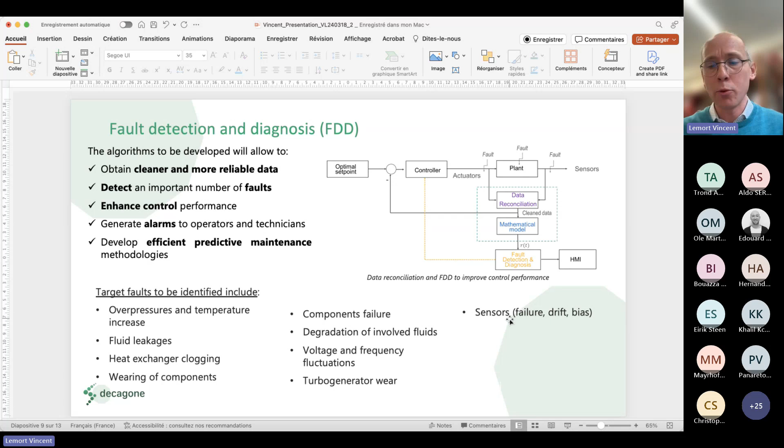And so in the project, we are investigating different types of faults. It could be clogging of heat exchangers, leakages from the system, wearing of turbo generators, but it could also be the sensors themselves. So we could have failures of sensors: total failure, so the sensor is not working anymore, drift or bias in the measurement, and that has to be accounted for.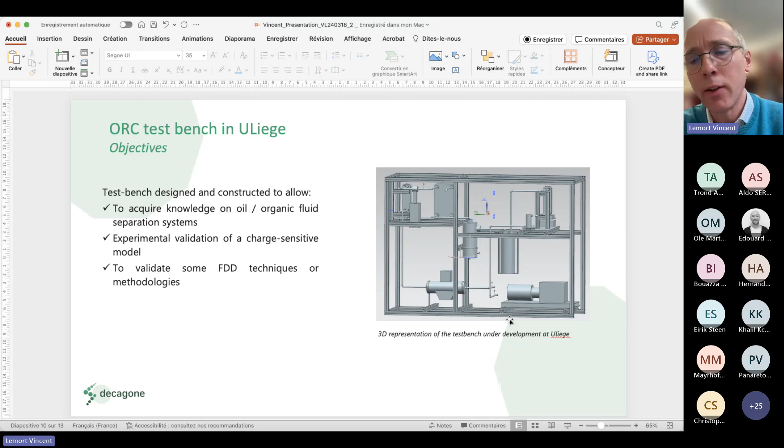So we are constructing a test rig right now in Liège. The idea is to get more knowledge about the oil and working fluid separation techniques, but also in general some more knowledge about oil-working fluid mixture properties, to validate experimentally some charge-sensitive models and also some active charge management techniques, and to validate some fault detection techniques and methodologies, including especially wearing of turbines and leakages of refrigerants.

Very quickly, some specifications of the test bench. We have a heat source of around 10-20 kilowatts. This is an ATEX system. The system must meet ATEX regulation because we are using cyclopentane. And we are not using a real turbine, but we are emulating it with a valve and a heat exchanger, the desuperheater here. So we can, with a simulation model, reproduce the exact operating conditions of the turbine at the inlet and the outlet.

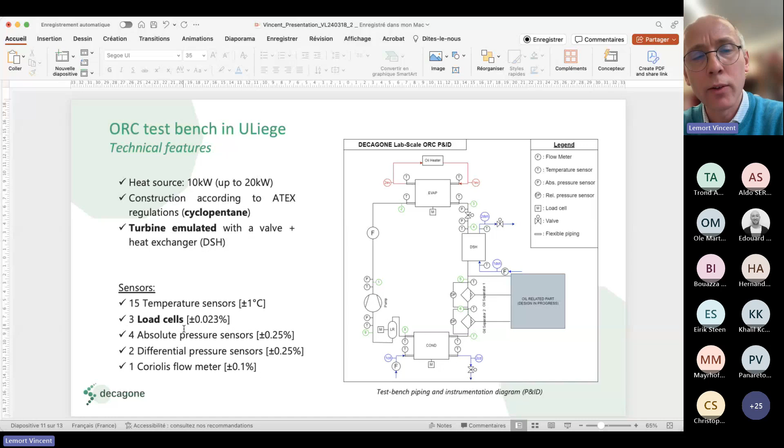The test bench is fully instrumented, but what is very important, we have 3 load cells in order to measure the charge repartition between the major components of the system, the ones that account for the largest quantity of working fluid. So we're weighing those components. This is what you can see here for the condenser. It is on the scale, and for the liquid receiver.

And so with this test bench, the goal is to, and these are the innovations we are expecting, develop the first charge-sensitive test bench operating with cyclopentane, to our best knowledge, to have more data for validating charge-sensitive models with cyclopentane, and also to fill the gap in the literature about cyclopentane oil miscibility,

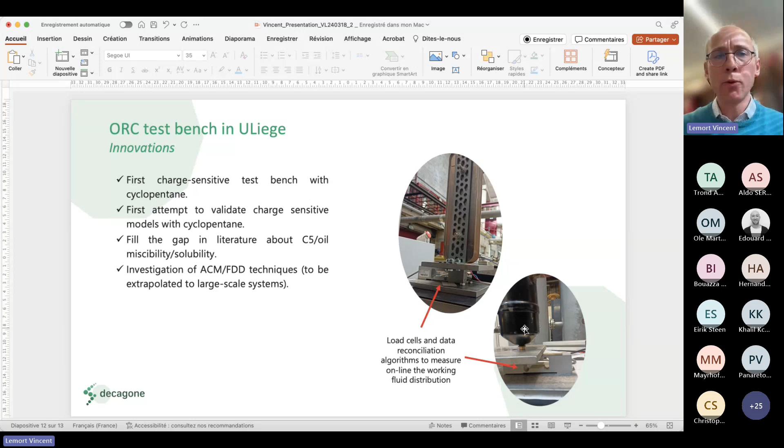solubility properties. And last but not least, to investigate some active charge management and fault detection and diagnosis techniques, with the aim at the end to extrapolate those techniques validated at lab scale to large scale systems, onto the 2 megawatt scale ORC module.

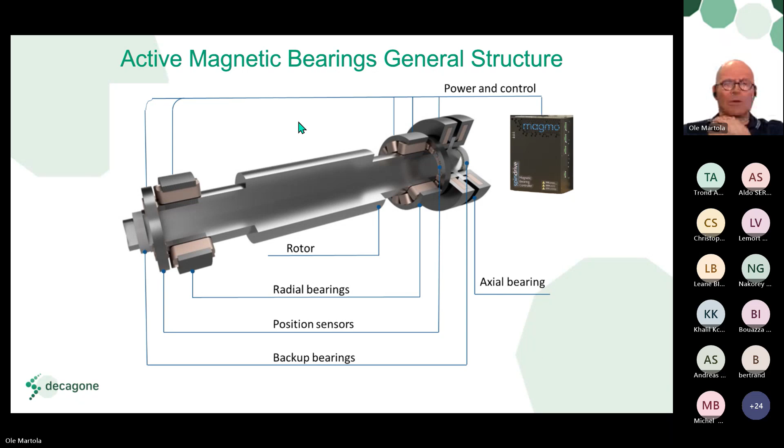Okay, and then what are the AMB technology advantages? An AMB system is very tolerant to harsh environments as well, because there's no need for complex structures, and because there's just the air gap between the rotor and the stator parts, it's not a big problem if there are some small particles in the air. They don't destroy or affect the magnetic field.

And also, active magnetic bearings are operational in vacuum environments as well.

So as I mentioned, there's no contact at all between the bearing elements, so there's no physical contact, so there's no friction. There's no component wear coming out of that, and because there's no touch, the operation is very quiet, and that affects the maintenance cost. And that was also one of the targets in this project.

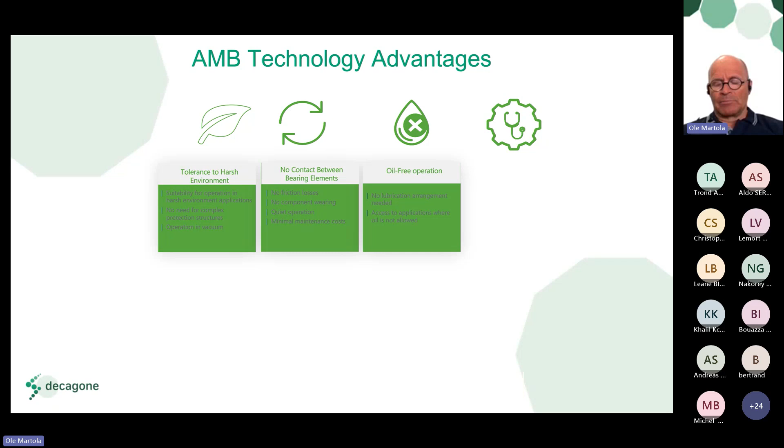Active magnetic bearings are completely oil-free, so the benefit there is if there's any process where oil is a problem. For example, in the food processing industry there can't be any oil in a process. So that is tackled here. And then another benefit is that you don't need a lubrication arrangement in the system. For example, if you have mechanical bearings, then you have to somehow arrange how the bearings are lubricated.

Then since the controller is continuously monitoring the system, it's kind of built-in condition monitoring in the AMB system. So you can have predictive maintenance, as actually Lemort was presenting. He mentioned these sensors that can be connected to the AMB system, and then easy integration with, for example, other monitoring systems like SCADA.

AMB technology consumes very little. It's an energy saving system since, as mentioned, there's no friction and losses. If I take an example, let's say a one megawatt machine, if you calculate 3% bearing losses, that makes already 30 kilowatts of bearing losses. But one AMB system consumes only, in our system for example, maximum 500 watts. So it's quite a significant difference compared to bearing losses.

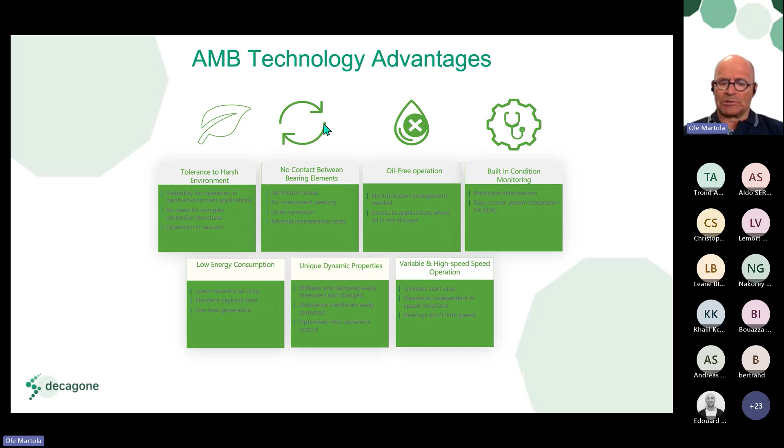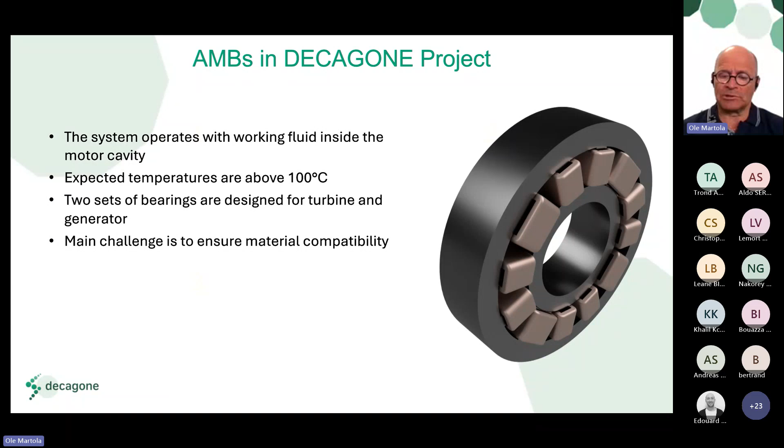In this DECAGONE project, there are two spinning parts: the turbine and the generator, and both of them are equipped with SpinDrive active magnetic bearings. Some challenges we are now dealing with are that the temperatures are quite high, but we want to keep the materials we are using standard, and at the moment it looks very much doable. And then the working fluid is something we must consider in this project. These are the main challenges in this DECAGONE project, and we can always cover them with different material selections. That is just part of this project.